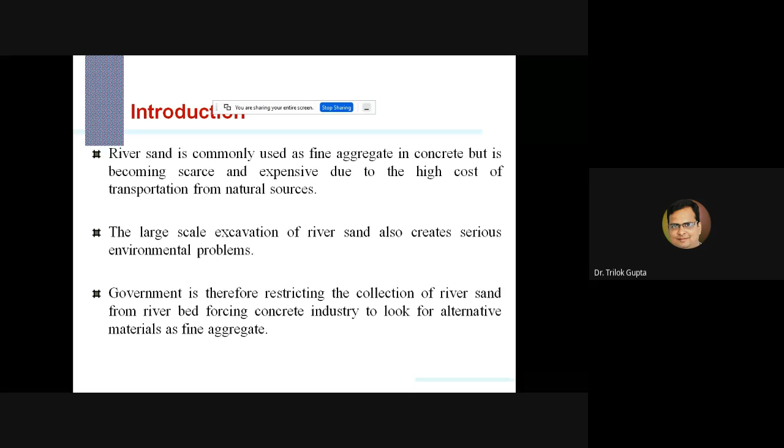As we know, river sand is a very hot issue today. River sand, also called fine aggregate or natural aggregate, is commonly used in concrete, but it is becoming scarce and expensive due to the high cost of transportation from natural sources. Large scale excavation of river sand also creates serious environmental problems, and government is restricting the collection of river sand from riverbeds, forcing the concrete industry to look for alternative materials as fine aggregate that can be effectively and sustainably used in concrete.

We think about whether sand mining is a solution or a threat. As the demand for sand continues to increase, sand mining seems to have popped up as one perfect solution to meet the demand. But sand mining has been causing huge environmental damages, and extreme in-stream sand mining is causing degradation of rivers and lowering of the stream bottom, which can ultimately lead to bank erosion. Decreasing sand in the stream bed and along coastal areas can cause deepening of rivers and expansion of coastal inlets and river mouths.

Saline water intrusion is another negative effect of sand mining. The consequences of mining are compounded by the effect of sea level rise. Any volume of sand exported from stream beds and coastal areas is a damage to the system. Irresponsible sand mining is also a huge threat to river banks, bridges, and nearby structures. It also affects the nearby groundwater system and the uses that local residents make of the river. Sand mining can be responsible for destruction of riparian and aquatic habitats through huge change in channel morphology. Effects include bed coarsening, bed degradation, lowering of water tables adjacent to the stream bed, and channel volatility.

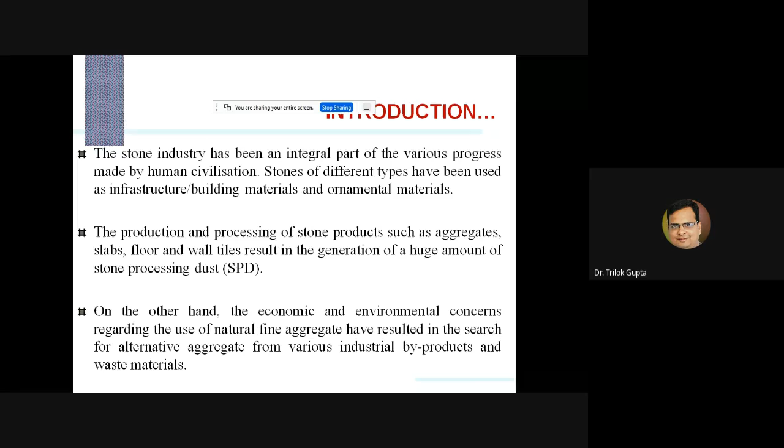Simultaneously, on the other hand, economic and environmental concerns regarding the use of natural fine aggregates have resulted in the search for alternative aggregates from various industrial byproducts or waste materials.

By using different types of crushers, we first use the primary crusher or jaw crusher to reduce the sizes. Then we use the impact crusher for processing to achieve whatever size we want, and after that we use sieves for grading purposes. Ultimately, there is some waste product, which is fine dust, called in our studies the stone processing dust. There are various disadvantages of this stone processing dust, which is basically a waste product generated during the manufacturing of coarse aggregates.

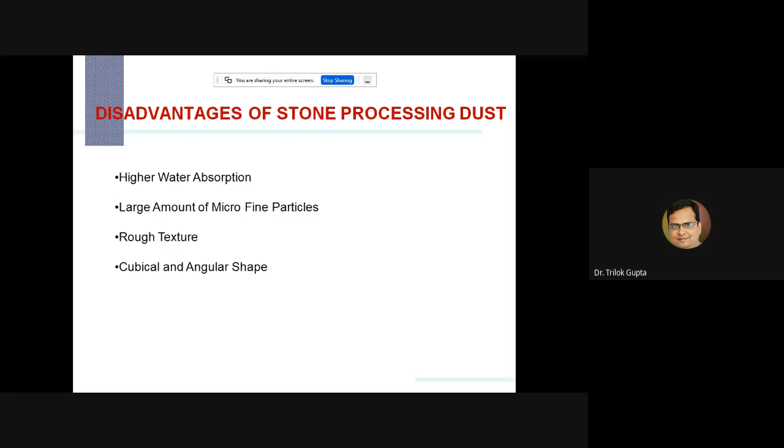stone processing dust, that is basically having high water absorption. In our case, the water absorption was more than 3%, and there are large amounts of microfine particles, and definitely it has rough textures, and sometimes it is a cubical or angular shape.

So there are some environmental problems associated with this stone processing dust, and as we know, our environment should be protected from man-made causes. So this is a very hot issue today, how we can sustain our environment, how we can retain our environment as it is, so that the ecological cycle cannot be disturbed, and human health cannot suffer much more.

So there are some major issues related to the environment associated with stone processing dust: the emission of dust at crushing plants causes extreme air contamination and may bring about airborne infection and diseases. This stone crusher industry is considered one of the most polluting industries of our country due to poor control technologies for dust emission and low technology penetration in the industry. The dust also adversely affects visibility, reduces growth of vegetation, and hampers the aesthetic view of the area.

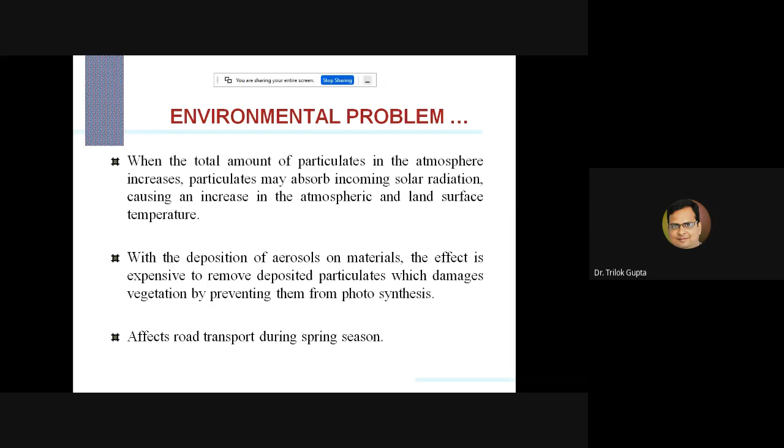And this also affects road transport during the spring season, because poor visibility is one of the reasons, and sometimes it may cause accidents. Dust settled over equipment will cause rapid wear and tear of rotating parts, and there may be corrosion of steel parts, which may lead to frequent breakdowns and higher maintenance costs.

The survey reveals that there is an adverse impact on the health of stone crusher workers in terms of diseases, like skin problems, eye problems, diarrhea, or lung infections. So these may be the common problems.

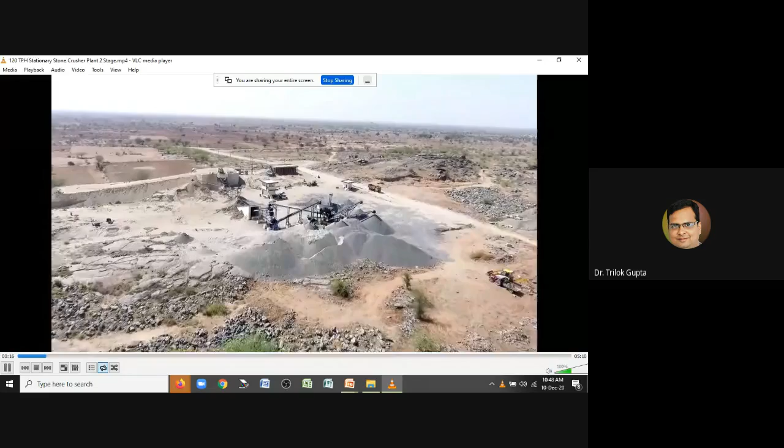This is a short video related to the Udaipur zone itself. There is a Mewar High Tech Engineering facility situated near Udaipur, around 15 kilometers away from the city, at a location called Umada.

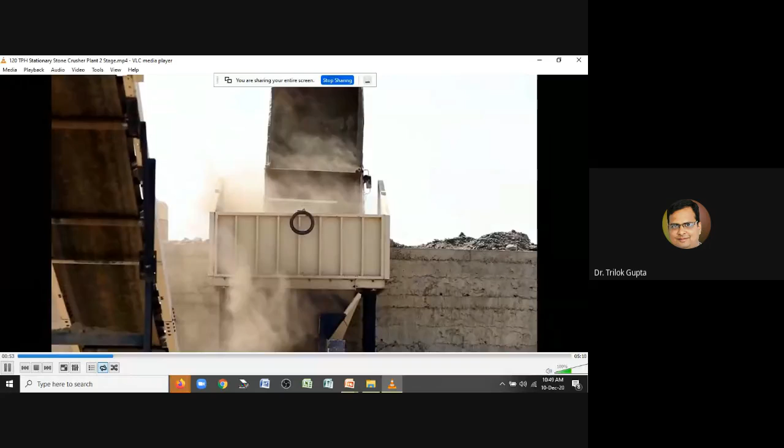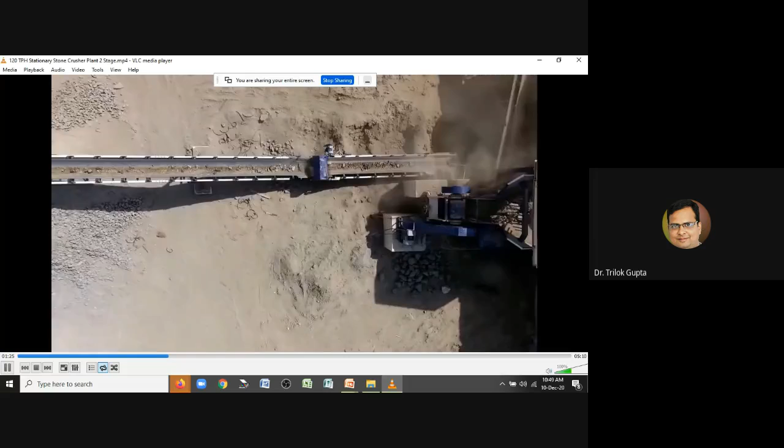This is a 120 ton per hour production unit for coarse aggregates, and simultaneously there is unintentional production of stone processing dust. We can visualize from this figure that the dust is mixing into the air and flowing in the air, which is definitely responsible for air pollution. During the crushing of such stones, there is a lot of unwanted noise created, which is also responsible for noise pollution. We can see that there is no control on the dust particles.

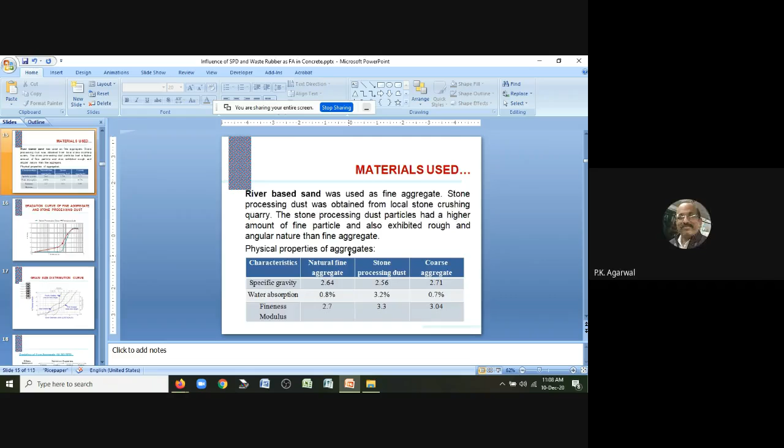So basically in the current study, we replace the natural fine aggregates with stone processing dust, up to 100% replacement in increments of 10%. We find out different types of mechanical properties and durability properties of this stone processing dust concrete, and finally we have calculated the economical and ecological aspects of the stone processing dust.

In this study, we used normal OPC cement of 43 grade, with properties including initial setting time and final setting time. The 7 days compressive strength of this cement was 34 MPa, and 28 days compressive strength was 44 MPa. Consistency was 30%, and specific gravity was 3.11.

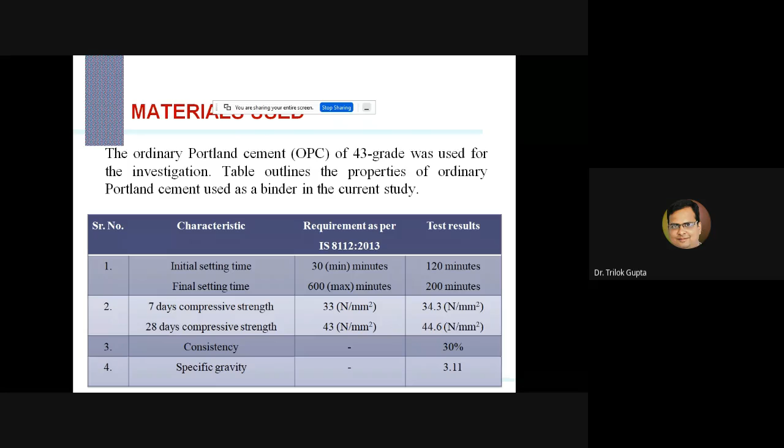Normal OPC cement of Ultratech brand was used, and river-based sand was used as fine aggregate. The stone processing dust was obtained from a local stone crushing plant, and the stone processing dust particles had a higher amount of fine particles and also exhibited rough and angular nature compared to the fine aggregates.

This table shows the physical properties of the aggregates. The specific gravity of fine aggregate was 2.64, and stone processing dust had a specific gravity of 2.56, whereas the coarse aggregate had a specific gravity of 2.71.

All material was obtained from the local area. This natural fine aggregate was obtained from the local river nearby Kharka river, and stone processing dust was obtained from the local crusher plant around 15 kilometers from the city, and coarse aggregate from the same plant. Water absorption was 3.2% for the stone processing dust as compared to 0.8% for the natural fine aggregates, which was too much due to the presence of fine particles. Coarse aggregate had a normal water absorption of 0.7%, and fineness modulus was 2.7, 3.3, and 3.04.

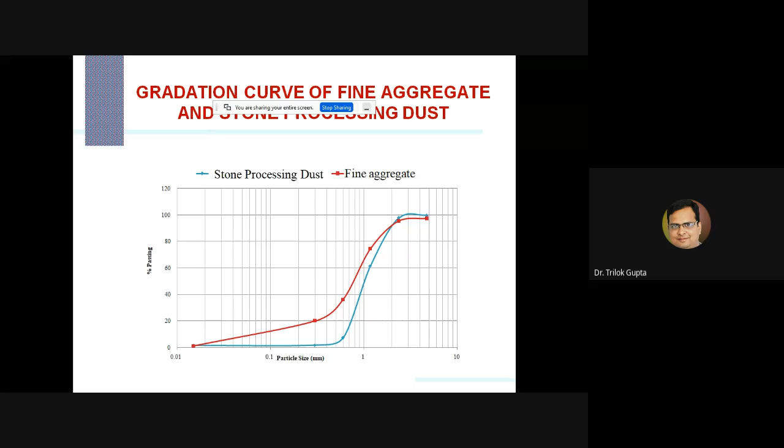This figure represents the gradation curve of the fine aggregate as well as the stone processing dust. As per the IS 383 code, both the fine aggregate and the stone processing dust lie in zone 2. As you know, zone 1 is the coarser one and zone 4 is the finer one, and the code does not recommend using zone 4 sand in concrete.

As we know, through grain size distribution we can classify grades of any kind of aggregate, whether coarse or fine. There is poor graded, where only one size of aggregate is available; gap graded, where one or two sizes are missing from the particle size distribution; and when all sizes are available, that is called well graded. According to this curve, our fine aggregate as well as the stone processing dust lie in the well graded category. This is the gradation classification of the fine aggregate as per IS 383.

So there are four classifications: zone 1, 2, 3, 4, and 4 is the finer one. We will not discuss that now. This is an important curve basically.

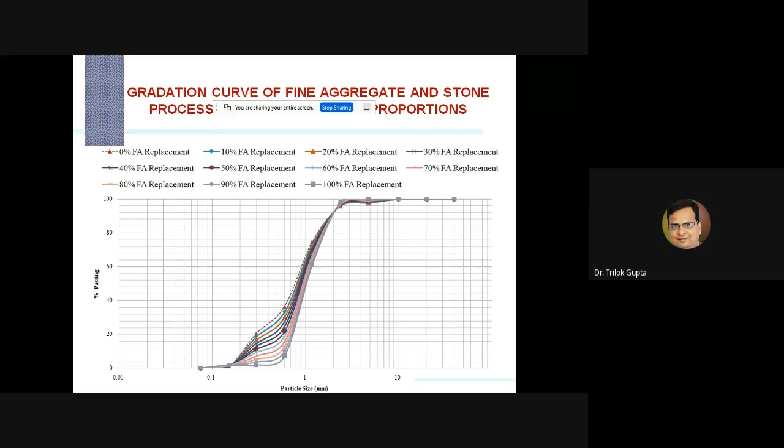The concrete mix design was carried out as per the guidelines of IS 10262, and we replaced the natural fine aggregates with stone processing dust in increments of 10%, going up to 100%. As shown in the last table, water absorption for the stone processing dust was around 4 times that of the natural river sand.

That's why we maintained the same water cement ratio. In this study we used a 0.45 water cement ratio. So we used compensatory water, meaning top-up mixing water was added to the concrete mix to counter water absorption of the aggregates, so that the same water cement ratio could be maintained. Normal casting was done as per standard practice: we cast the mold, left it for 24 hours, then submerged it in water until testing.

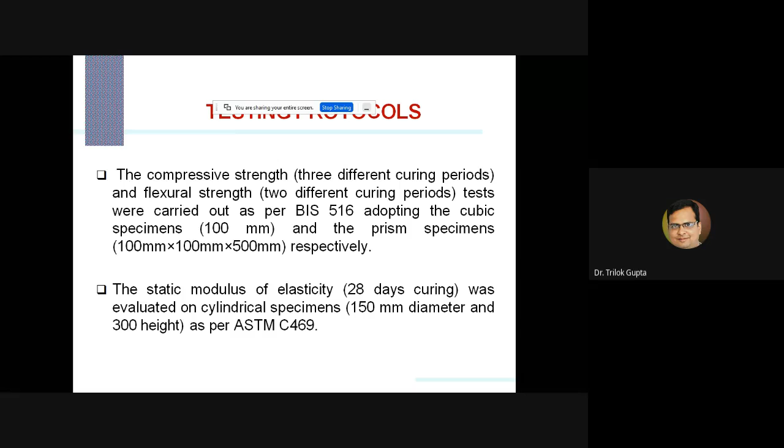It was determined on cylindrical specimens having a diameter of 150 mm and height of 300 mm, and the code followed for the static modulus was ASTM C469. Three specimens were tested for each type of test.

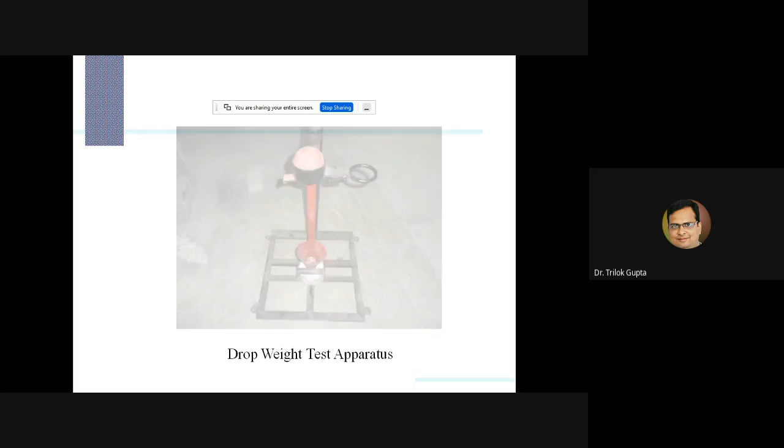After that, to find out the ductile properties, we use the impact resistance by using the drop weight test, as per ACI, American Concrete Institute 544. This type of apparatus was used to calculate the drop weight.

In this, we use cylindrical specimens having diameter of 150 mm and height of 75 mm. We drop a hammer ball having weight of 10 pounds, around 4.5 kg, with height of fall of 450 mm, 0.45 meter. We note down how many number of blows or falls are required for the first crack as well as the ultimate failure - meaning how many blows are required to develop the single hairline crack, initial crack.

That was noted as N1. After that, we continue the testing process and count the number of drops or blows required for the ultimate failure, which is breakdown into number of pieces, meaning more than 2 pieces.

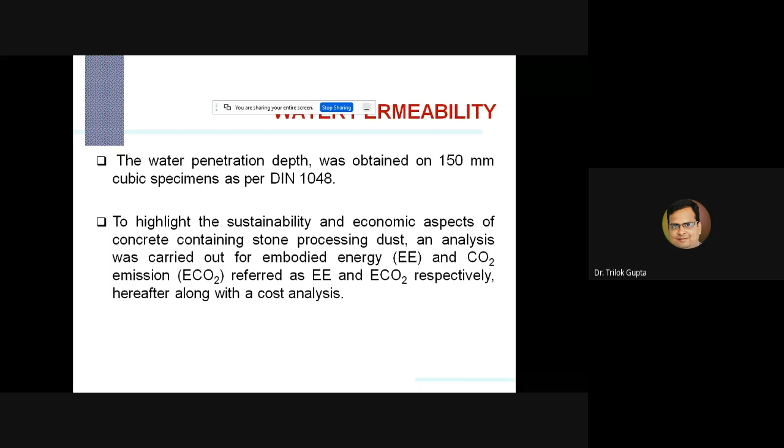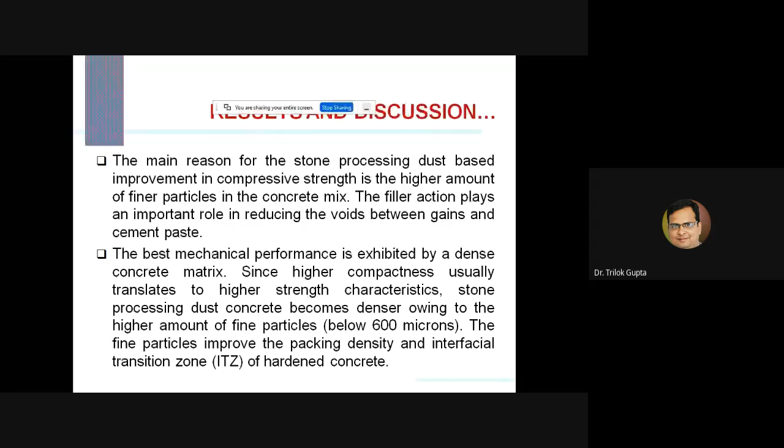the higher amount of finer particles in the concrete mix, due to stone processing dust. The filler action plays an important role in reducing the voids between the grains and the cement paste. The best mechanical performance is exhibited by a dense concrete matrix, since higher compactness usually translates to higher strength. Stone processing dust concrete becomes denser owing to the higher amount of fine particles, that is, less than 600 microns.

The fine particles improve the packing density and the interfacial transition zone of the hardened concrete. For higher replacement of stone processing dust, greater than 70%, the higher amount of fines left after filling the voids increases the cement paste to particle ratio, resulting in lower compressive strength. Additionally, the angular nature of the stone processing dust increases the surface area to be covered by the cement paste, causing the development of voids. These voids have a weaker plane, which leads to low compressive strength. Furthermore, this angularity also lowers the compactness of the concrete by increasing the interparticle friction.

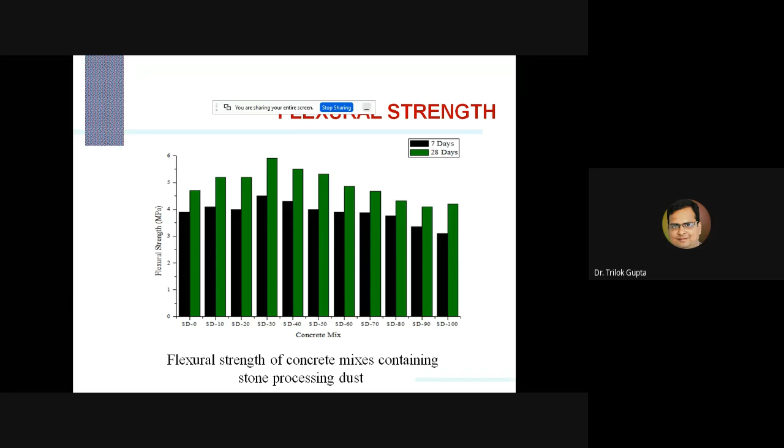As compared to compressive strength, the mechanism of the flexure strength loading is quite different. However, a similar trend was observed between the flexure strength and compressive strength, up to the 30% replacement. Basically this is the same reason, because of particle packing. The fine particles of stone processing dust act like a filler by filling the voids between the cement paste and aggregates, thus strengthening the concrete specimen.

Furthermore, this enhances the compactness and increases the flexure load carrying capacity of concrete containing stone processing dust. We can say that this enhanced compactness improves the interfacial transition zone (ITZ) characteristics of concrete, which helps in the increased capacity to carry flexure loading.

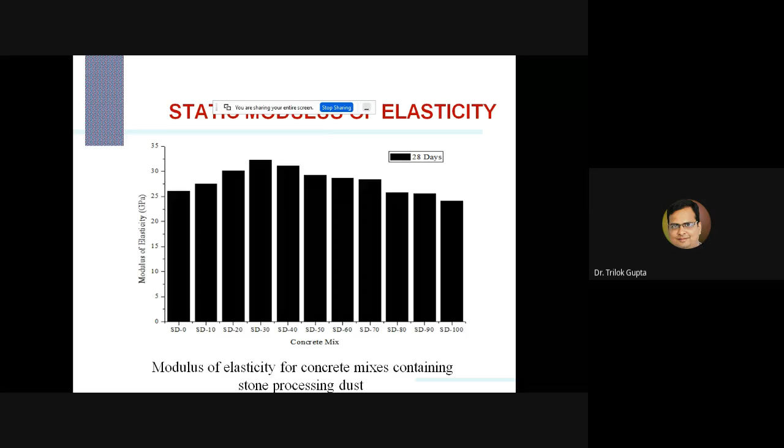Now this next figure shows the 28 days static modulus of elasticity of this concrete. Again, we can observe from the figure that it is increasing, and it is highest at 30%, and after that it goes down, and approximately after 70% it was less than the control mix. Basically, this static modulus of elasticity depends on various factors, such as the type of coarse aggregate, mortar paste stiffness, bond between aggregates and mortar matrix, and void porosity of concrete.

Since the type of coarse aggregate remains the same throughout the study, the rest of the three factors - mortar paste stiffness, bond between aggregate and mortar, and void porosity of concrete - play an important role in influencing the elasticity modulus of the stone processing dust concrete. The addition of finer particles of stone processing dust improves the microstructure of concrete, providing better bonding characteristics between aggregate and mortar matrix. This dense concrete matrix, due to the filler action of the fine particles, presents higher stiffness of mortar paste and increases the elasticity of concrete.

And that's why we got this higher static modulus of elasticity up to the 70% replacement. So that was this. Now we come to the impact resistance.

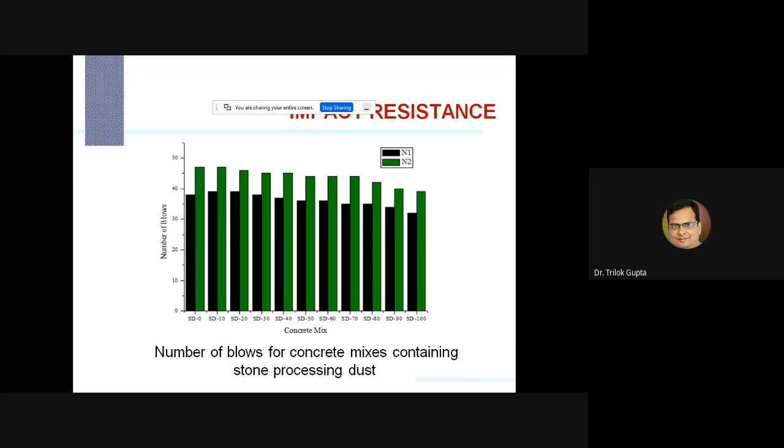But for concrete mixes containing stone processing dust higher than 40%, the impact energy is less than the control mix. So we can observe that after 40%, there is a decrease in impact energy. This impact resistance of concrete depends on the paste-aggregate contact area and bond, how stiff the bond is, and a solid concrete matrix enhances these properties, which are instrumental in resisting the propagation of cracks.

For concrete mixes containing up to 40% stone processing dust, the fine particles densify the cement paste matrix, thereby improving its bond characteristics with the aggregates. In case of higher substitution, more than 40%, the angularity of the aggregates leads to the creation of voids, which provide easy access for crack development. These voids facilitate faster crack development, as a higher amount of voids accelerates the propagation of cracks.

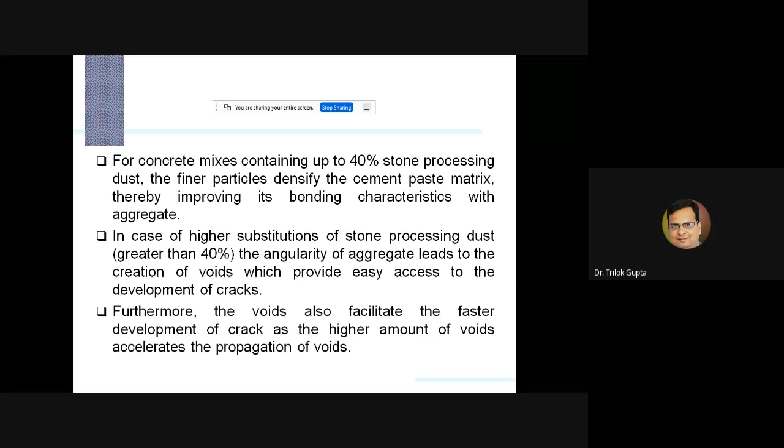This may be due to the higher amount of fine particles, which have the tendency for high resistance up to 20%, but beyond that, this mortar paste containing a high amount of fine particles gets easily eroded when exposed to abrasive force. The fine particles lodged between granular voids are removed from the pockets during abrasive action, and this may increase the depth of wear.

The voids in concrete with a higher amount of stone processing dust also lower the abrasion resistance of concrete, as the chipping action of the abrasive force ultimately weakens the bond of the main body.

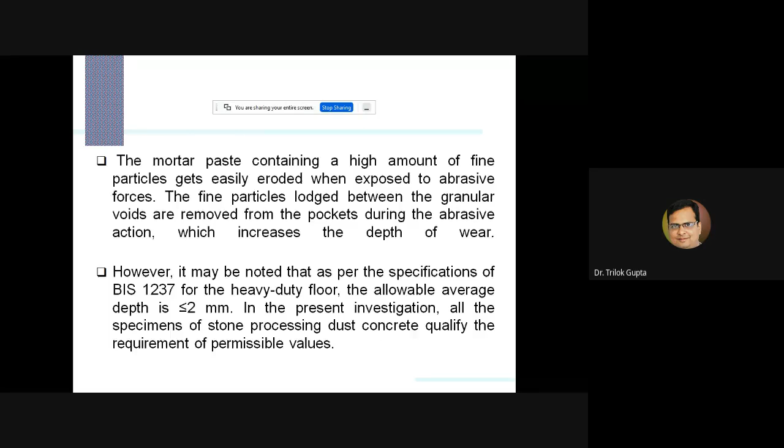As per IS 1237, for heavy duty floors, the average depth of wear allowed is less than or equal to 2 mm. In our case, the value was less than approximately 1.1 mm, even up to the replacement level of 100%. So we can classify and use such concrete up to 100% replacement.

Now in the next category, we find out the water permeability in terms of water penetration depth. As we know, water permeability or water penetration depth provides insight into the durability potential of concrete against ingress of harmful external agents, which can severely compromise the service life of concrete elements.

That may ultimately be responsible for corrosion because of the ingress of water into the concrete, as well as chloride ions, as well as air voids. So such a combination may lead to corrosion.

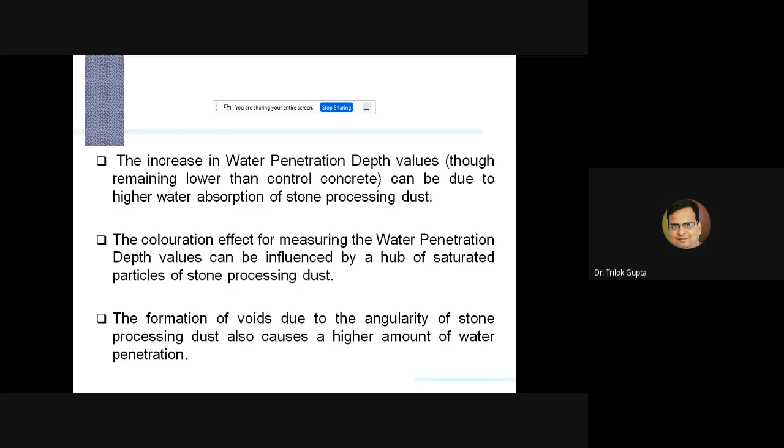In our case, in all cases it was less than 30 mm, so we can say our concrete had low permeability. The increase in water penetration depth value can be due to the high water absorption of the stone processing dust, and this can be influenced by the saturated particles of the stone processing dust. The formation of voids due to the angularity of stone processing dust also causes a higher amount of water penetration.

As we know, stone processing dust is a byproduct of the stone crushing plant, received as-is from the plant. That's why we do not account for any embodied energy for this stone processing dust, since it is a byproduct. Whereas the embodied energy for OPC and fine aggregates was taken from a study carried out by Mithun et al.

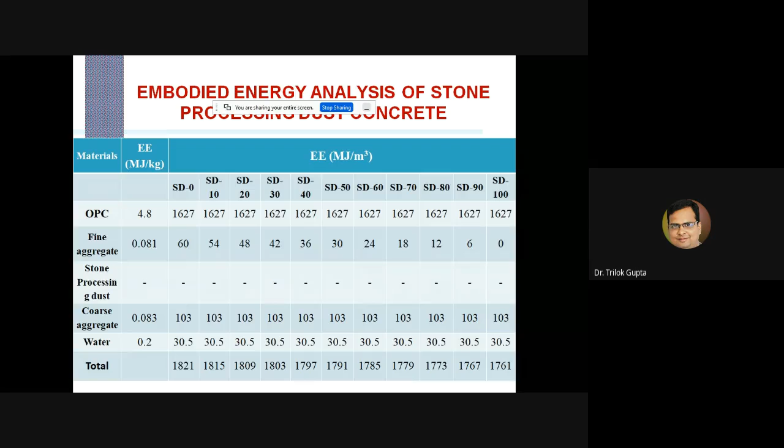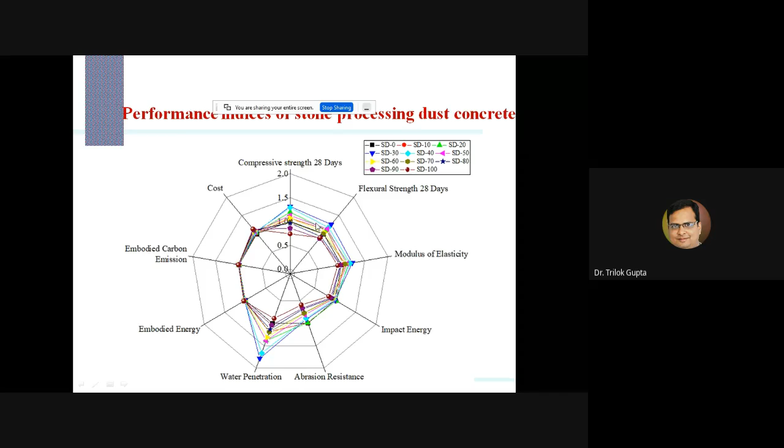In this way, we calculated all other parameters, and in terms of better concrete, we can go for 30% replacement, and if we want to utilize maximum stone processing dust, then we can go for 70% replacement.

So now it comes to the conclusion part. As compared to natural fine aggregates, the stone processing dust contains a higher amount of fine particles and has higher water absorption capacity. Results show that increasing the percentage of stone processing dust up to 70% improves the compressive and flexural strength of concrete, with densification of the concrete structure due to the filler action of fine particles considered as the major cause.

The reduced voids and improved bonding between cement paste and aggregates due to the fine particles of stone processing dust resulted in improved elastic modulus of concrete.

Stone processing dust did not play a significant role in affecting the impact resistance of concrete. However, at higher percentages, greater than 70%, the voids in concrete due to angularity of stone processing dust lowered the impact resistance.

The abrasion resistance of concrete was negatively affected by stone processing dust. The chipping action of abrasion was predominant in dislodging the rough particles of stone processing dust from the concrete matrix.

The depth of water penetration was lowered in the concrete containing stone processing dust, as the fine particles block the pores and capillary voids in the concrete matrix.

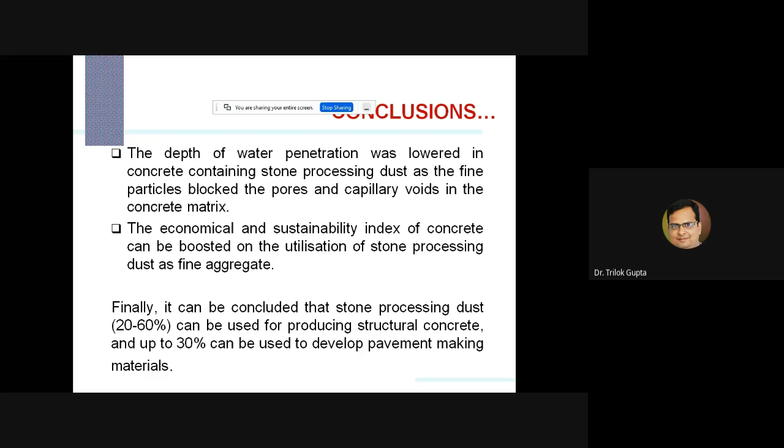Finally, we can conclude that stone processing dust up to 60% can be used without much effect on the durability and mechanical properties to produce structural concrete, and up to 30% can be used for development of paver blocks or pavement material, because there was a reduction in flexural strength after 30%.

Now we come to our second part. I think there is only 15 minutes left, so we go quickly into when we use this waste material, waste rubber tires, in the concrete as partial replacement of the fine aggregate.

Basically, we know that concrete is a brittle material, and high flexibility is required. Higher impact resistance or higher fatigue resistance is required in many applications, apart from strength, where strength is not a major concern in some applications and we require higher flexibility. At that time, which type of concrete can we use?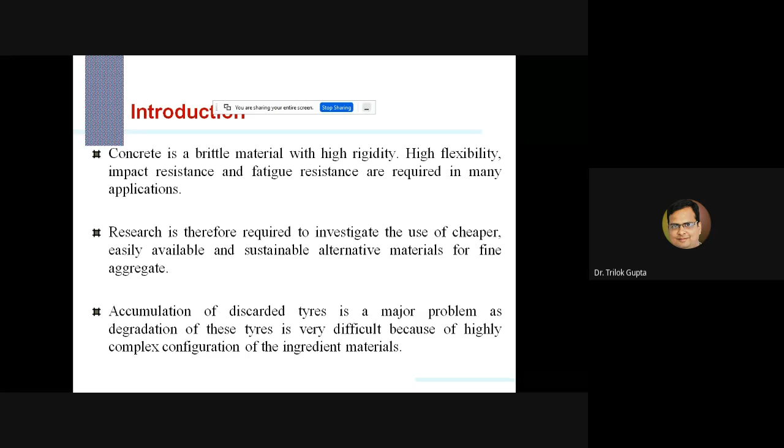Now it comes to our waste material. Basically, in this study we used two types of waste rubber tire material.

First was the rubber ash, which was obtained by the pyrolysis technique. Basically, that is incineration of waste rubber tires at a controlled temperature of around 850 degrees Celsius for 3 days, resulting in a specific gravity of only 1.33, and size was in between...

0.5, and absorption was only 0.3%. These are the chemical compositions, having carbon content around 65%.

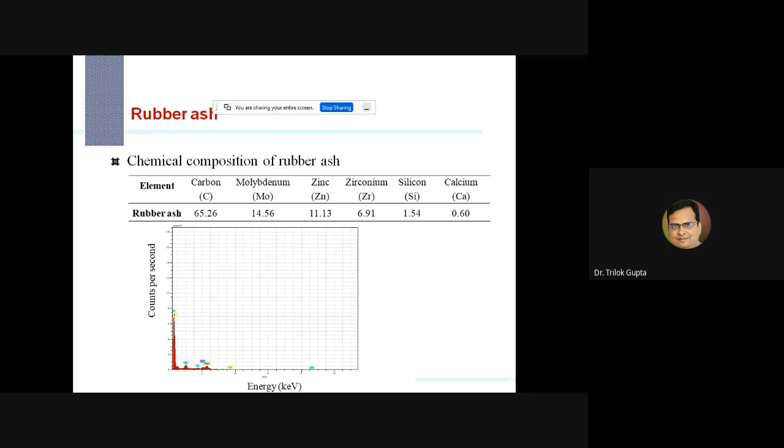Now, another form of this waste rubber tire used in this study was rubber fibers. Specific gravity was 1.07 and water absorption was 0.4%.

Using the same waste rubber tires, these were obtained by mechanical grinding. To obtain the rubber ash, we use the pyrolysis technique, but to obtain the rubber fibers, we simply use mechanical grinding of the waste rubber.

Tensile strength was 20.8 MPa, whereas the width was 2 mm to 5 mm, and length was around 20 mm. The aspect ratio was 4 to 10. Aspect ratio is the ratio of length to width or diameter.

Specific gravity 1.07, water absorption 0.4, and lies in zone 2. There was a higher percentage of carbon because there was no heating process, so the carbon content was 87%.

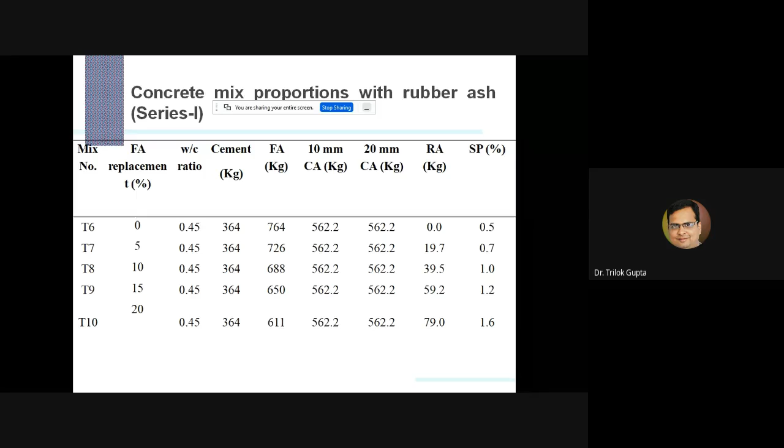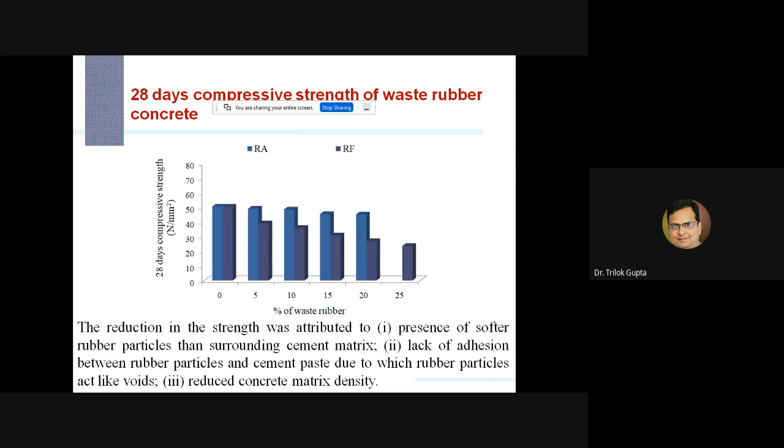Compressive strength was again calculated. The figure shows the 28-day compressive strength, and reduction was observed in case of rubber ash as well as rubber fiber. But in case of rubber fiber, there was much more reduction compared to rubber ash concrete. The reason was the presence of softer rubber particles than the surrounding cement matrix, and lack of adhesion between rubber particles and cement paste, due to which rubber particles act like voids and reduce concrete matrix density.

Now, abrasion resistance: depth of wear increases with increasing replacement level of rubber ash, whereas it decreases with increasing replacement level of rubber fibers, because it was very difficult to abrade rubber fiber concrete.

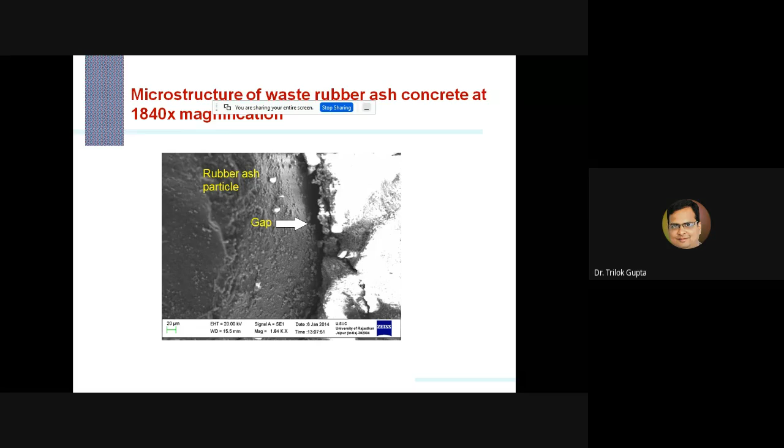These are some scanning microscopic images. This figure shows rubber ash particles at a magnification of 1840, and we can visualize a gap between the rubber ash and the cement paste, which was the reason of reduction in compressive strength. We can also observe cracks between the rubber ash particles and cement paste, along with further gaps and cracks.

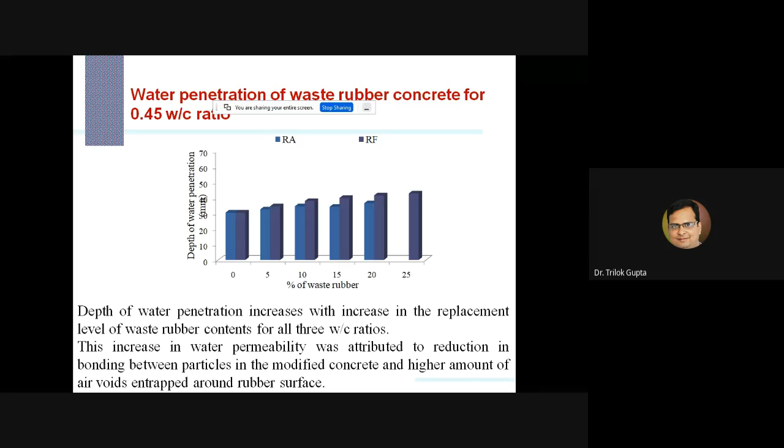The figure shows the water penetration depth of the waste rubber concrete at a 0.45 water-cement ratio. Depth of water penetration increases with increasing replacement level of waste rubber content for all water-cement ratios. This increase in water permeability was attributed to reduced bonding between particles in modified concrete and a higher amount of air voids entrapped around the rubber surface.

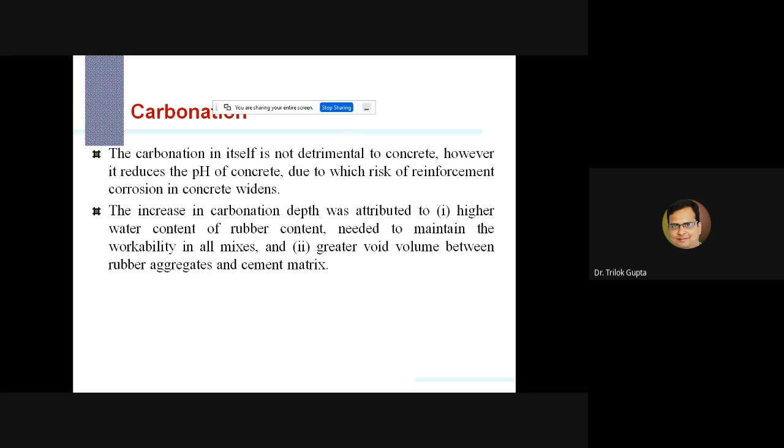Static modulus was also evaluated, and it again decreased, as this is a dependent property of compressive strength. The basic reason was the lower modulus of elasticity of the newly added material, which was softer compared to the original material.

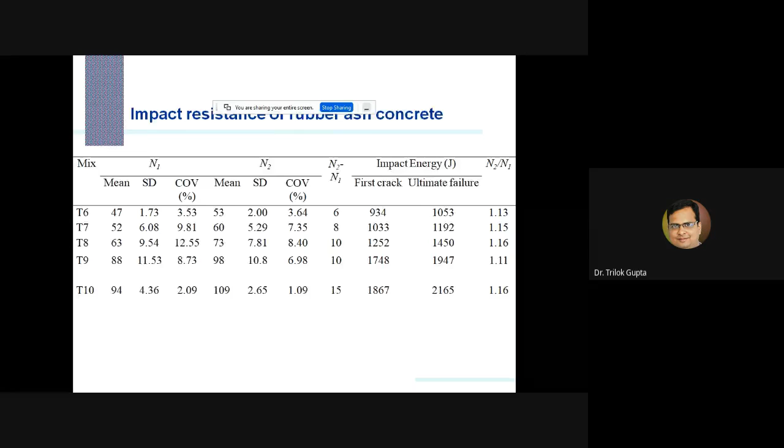We can observe around 100% increment in the case of 20% replacement of rubber aggregate, and in case of rubber fiber concrete, there was around a 4 times increase in impact resistance. So, like crash barriers or curb stones, where collision of vehicles may happen, at that time we can use this type of concrete.

The increase in impact energy resistance may be due to less brittleness and much lower elastic modulus of rubber aggregates, which increases impact resistance, and the ability of rubber to absorb dynamic energy increases the strength of concrete under impact loading. This was the failure pattern in case of waste rubber concrete.

In the case of the control concrete, the first figure shows brittle failure, and in the case of the 25% rubber fiber concrete, we can say that there was ductile failure.

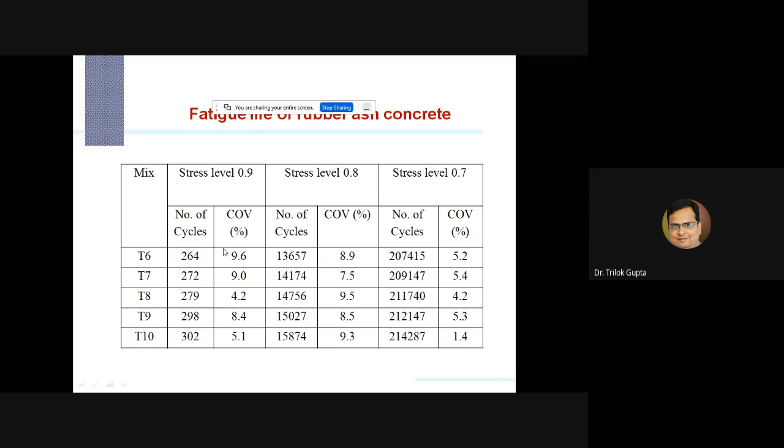Now the fatigue strength was also calculated at a frequency of 5 Hz, and we can observe that there was a stress level ratio at 3 levels. Due to time limitation, we will not discuss more in detail. Fatigue resistance was increased in case of both rubber ash concrete and rubber fiber concrete, but in case of rubber fiber concrete there was much more increment. This increase in fatigue strength may be due to the rubber particles being able to absorb more energy when subjected to fatigue loading, which also reduces the probability of internal crack propagation and prevents aggregate segregation with the waste rubber particles.

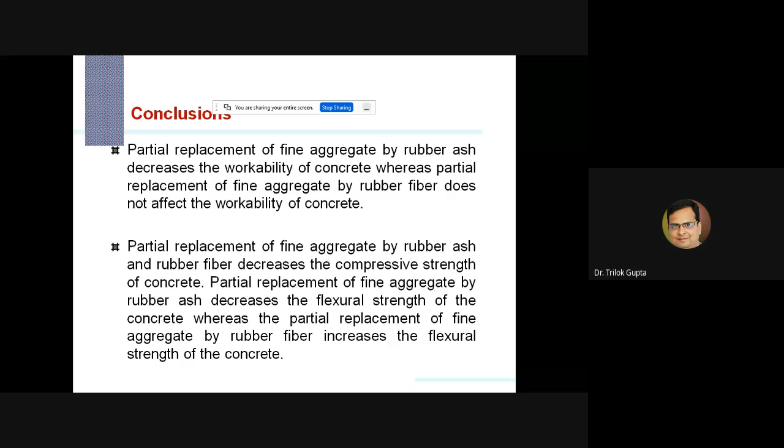Now for conclusions: we can conclude that workability, if we use superplasticizers, was not affected, but in case of rubber ash there was a decrease. Partial replacement of fine aggregate by rubber ash and rubber fiber decreased the compressive strength. In case of flexure strength, rubber ash concrete decreased flexure strength, but rubber fiber concrete showed enhancement or increment.

The maximum depth of wear in rubber ash and rubber fiber concrete is less than the permissible limit. The water permeability remains in the category of medium permeability. Rubber ash and rubber fiber particles increase the drying shrinkage. The observed carbonation depth for rubber ash and rubber fiber concrete in the most adverse condition is less than the minimum cover required. The reduction in static and dynamic modulus shows higher flexibility.

Impact resistance of concrete improves on replacement of fine aggregate by rubber ash and rubber fiber content. Fatigue strength of concrete also improves on replacement of fine aggregate by rubber ash and rubber fiber content. We can conclude from this study that fine aggregate can be replaced by rubber fiber and rubber ash where ductility is the prime concern and strength is not the prime concern.

Rubberized concrete can be used in partition walls due to its lightweight nature, pedestrian blocks and residential driveways due to higher flexure strength in case of rubber fiber concrete, garage floors, highway crash barriers due to better impact resistance, and machine foundations due to better fatigue resistance.

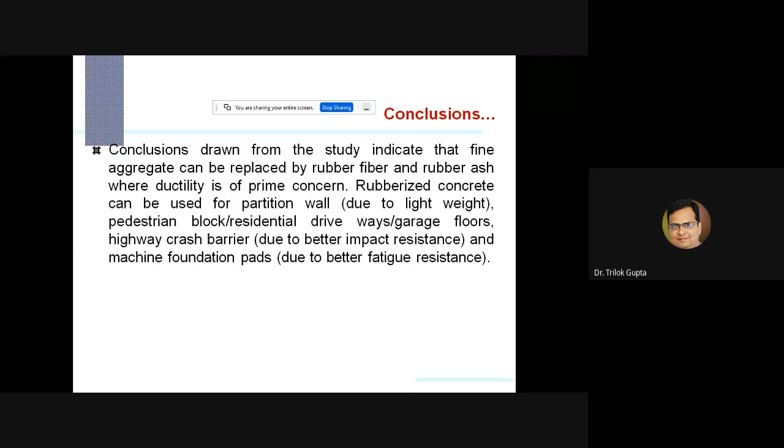So thank you, I think I have taken much more time.

Now the screen has moved out. I don't know where is the issue. Whether others are able to see. Hello.

Haan, koi participant unmute karke bata dein, aap logon ko screen dikh raha hai kya? Yes sir, it is visible. Yes sir, but for me it is not. Now I am not getting the screen. I am perhaps getting your screen, the entire screen, not the presentation part.

Let me join again. Sir, you have joined again, sir. Are you able to see the screen? No, I am not able to see the screen. I don't know what is happening.

Now I am able to see the screen, sir. So should I? No, yes. It has moved out once again. First slide, it is not visible to you, sir. One second.

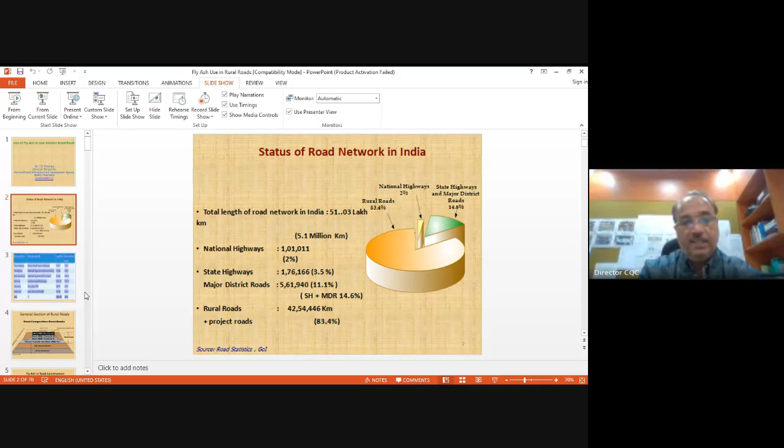Here you can see the road network in India is 51 lakh kilometers. National highways are 1 lakh. Actually, on the next slide you will find slightly different data, because as on date it is much different from what has come on the screen. State highways are around 3.5%, which is 1.7 lakh kilometers. Major district roads are 5,61,940. Rural roads are 42,54,000 kilometers, including the project roads. So roughly this government publication shows around 83% of the roads, including project roads, are rural roads. That is the whole purpose of showing this slide.

In the second slide, now you can see here this shows 56 lakh 3,293. This is as-on-date record from the same Ministry of Road Transport and Highways, NHAI website, etc. So roughly a 5 lakh kilometer data difference is straightaway there.

There are a variety of reasons for this; we need not go into the details. Our focus point is low volume roads, which are mostly looked after by Rural Works Departments, PWDs, and Panchayati Raj institutions in different states. Here it comes to around 70%. I have kept project roads separately, which if added, around 6%, becomes 76%. So we can say in a nutshell that rural roads are not less than 70% of the overall road network of the country. Actually speaking, in terms of length it is more than 70%, but in terms of volume which they carry, it is very small.

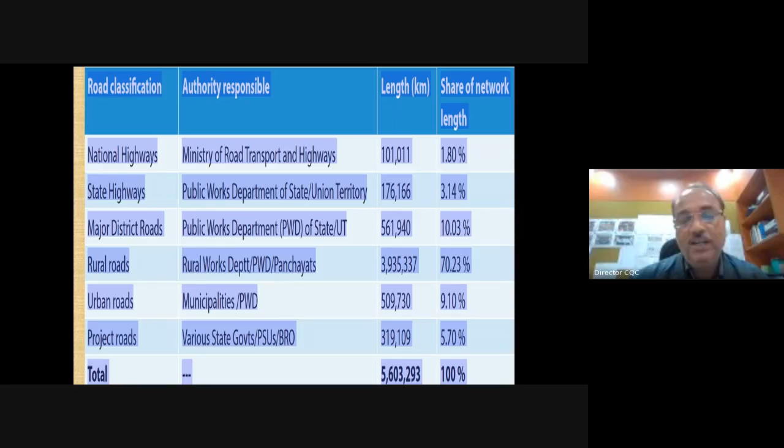40% of the commercial traffic is normally carried by the national highways, which are only 1.8% of the network. And that is why for the last 10-15 years you must have seen a huge number of schemes, tremendous investment being made in development of national highways, so that this can be made at least 4 to 5%, and the load of traffic can be substantially reduced on the existing highways.

As on date, working as Director Project, I am responsible for quality assurance systems, trainings, human resources development, and R&D component under the Pradhan Mantri Gram Sadak Yojana.

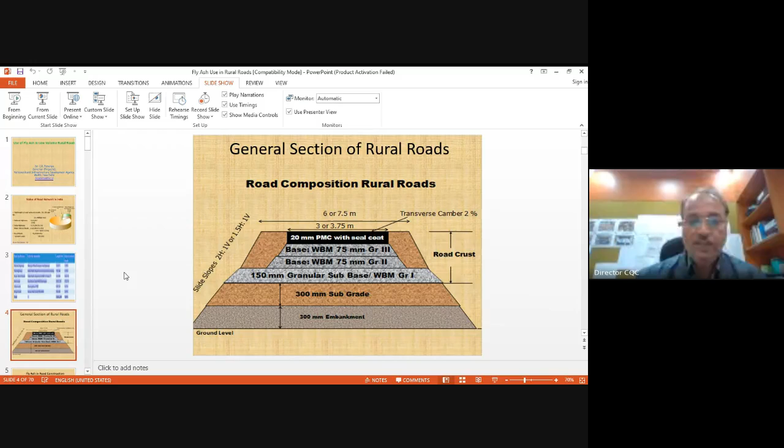This is the standard section which is being used commonly in most of the rural roads. Here you can see we have a thin embankment of around 300 millimeters subgrade. Above that, we have around 150 millimeter granular subbase, 2 layers of WBM, and a thin bituminous premix carpet surface with seal coat. This is the general cross section. Both sides there are shoulders which are around 1.7 to 1.85 meter wide. The overall road top width is 7.5 meter in general.

Many times it is 6 meters, and even now we are constructing a couple of intermediate lanes, so there the overall width at top will be around 9.5 meters. The purpose of showing this slide is that in rural roads, we are constructing the embankment, including the subgrade, which is not more than 600 millimeters in majority of the roads.

The general impression in the minds of our qualified engineers is that when we have a thin embankment and subgrade less than 600 millimeters, how fly ash can be used in construction of rural roads. So that is what we will be discussing in the upcoming slides, that even with this kind of thin sections, or even when we have this kind of thin subgrade and embankment, we can make use of fly ash, and a couple of roads have been already built in various components. If there is a will, we can definitely do it.

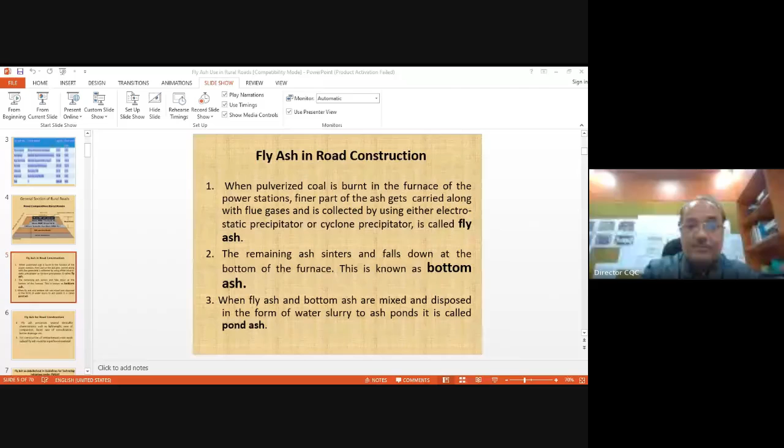So when fly ash is being used in some or other form, the road is sanctioned as a road of new technology initiative. In fact, the IRC guidelines provide that there should be a minimum cover of 50 centimeter on the fly ash layer. So in our new technology guidelines, as I said in the beginning, our total embankment, including subgrade thickness, is hardly 60 centimeter, and we have to provide a cover of 50 centimeter to the fly ash layer. That means only 10 centimeter embankment can be made with fly ash.

So just to avoid this, we discussed with a couple of stakeholders, fly ash producers, other scientists working in CRRI and various other agencies, and finally took a decision that out of 60 centimeter, we will be making 30 centimeter embankment with fly ash, and the requirement of all-round cover can be reduced to 30 centimeter only.

So we issued these guidelines. Then Government of India also issued guidelines in general that within 100 kilometers of a thermal power station, the use of fly ash in road construction is mandatory. We got this revised in 2016 after a lot of discussion with Niti Aayog, which is keeping a follow-up with all agencies for utilization of all kinds of waste materials.

Then the Ministry of Environment and Forest issued a separate government resolution, which clearly indicates that for rural roads, especially being constructed under Pradhan Mantri Gram Sadak Yojana, from thermal power plants up to 300 kilometers, the transportation is to be done by the producers, and it is to be supplied free of cost right at the place of construction of the road.

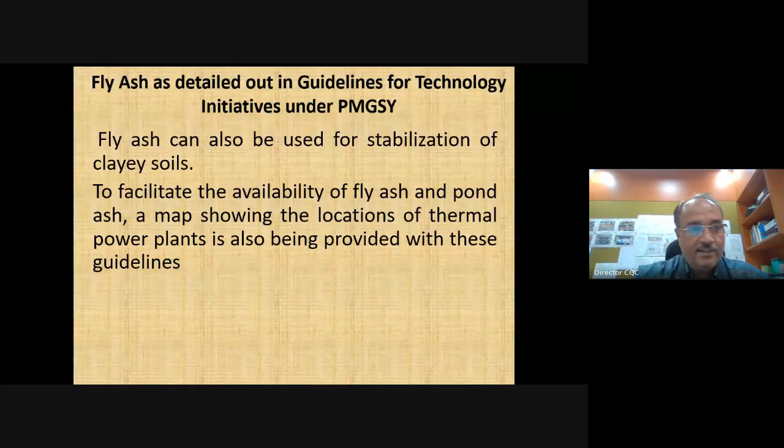I hope I'm visible and audible. The screen is visible. Hello. Sir, you are audible to me. I think any participant may confirm if it is visible. Any participant can unmute himself or herself and confirm whether the slides are visible. Yes, sir, it is visible.

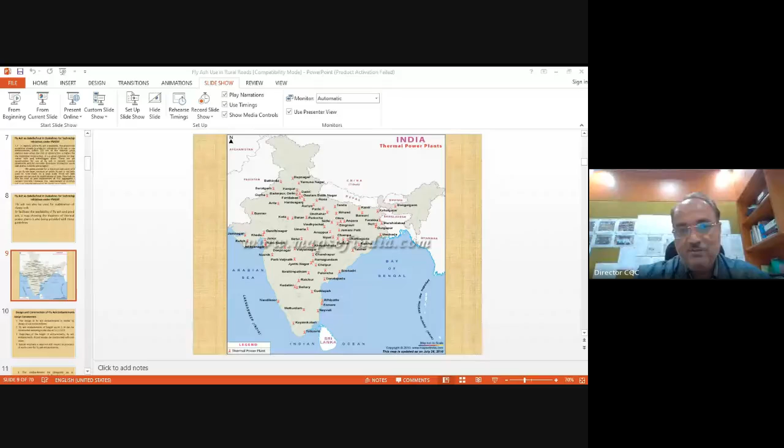So right now on the screen, there is a map which shows the locations of various thermal power plants in the country. Using this map, which was prepared basically by the Central Electricity Authority, we have requested them to provide the geo coordinates of all these power plants. We have requested each of the plant operators to provide us the general characteristics of the fly ash, pond ash, whatever is available, and we have also requested them to provide the contact details of the people who will be handling the supply.

Whosoever has provided this, we have put it on our website, pmgsy.nic.in. We now have a complete GIS database, where we have provided the locations of these plants. From each plant, in order to check whether I am within 100 or 300 kilometers, and from which plant transportation will be easier and cost less, we have provided a facility on that GIS platform where the user can click and draw a circle of 100, 200, or 300 kilometers, so that he will know from which plant he should get the supply.

So with this, a couple of agencies have come forward, and now they have started use of the fly ash.

Design and construction of fly ash embankments. In general, these are the design considerations. Fly ash embankment design is similar to that of soil embankments. Fly ash embankments of height up to 3 meters can be constructed adopting a side slope of 1:1.5. Regardless of height of embankment, fly ash embankments should always be constructed with soil cover. The focal point is that wherever we are using fly ash in layers, we have to keep a minimum all-round cover of 30 centimeters, that is on sides as well as on top.

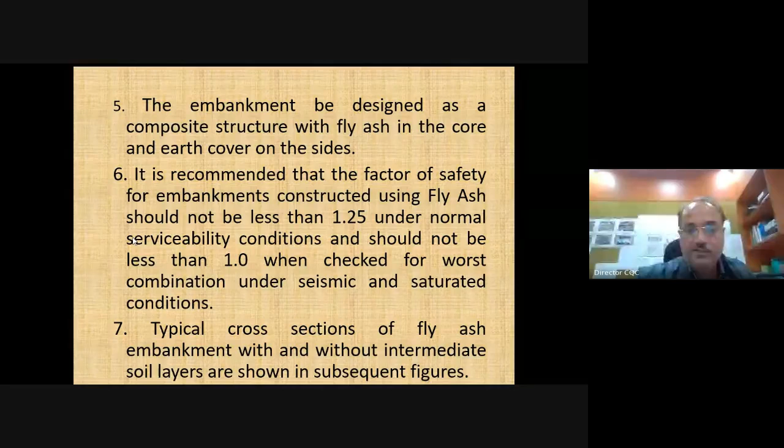So this is an additional factor of safety. A typical cross section of a fly ash embankment, with and without intermediate soil layers, is shown in the subsequent slides. This also shows a 0.5 meter minimum cover, but later on we changed it to 30 centimeters, 0.3 meter on each side.

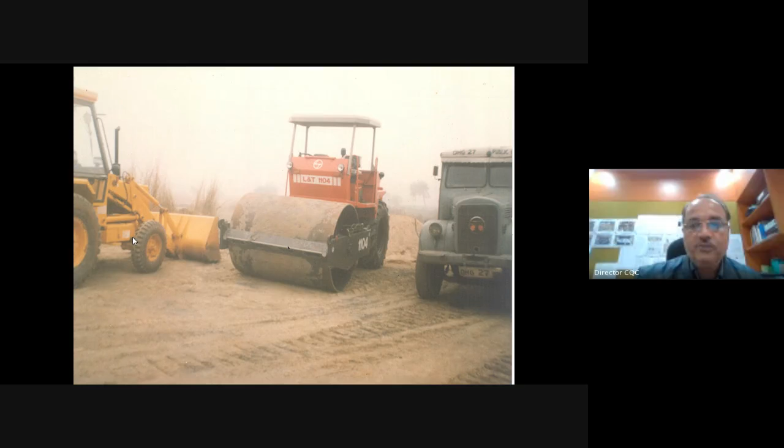So what will happen? You will fill up this trench with fly ash, consuming substantial volume. On top of it, you will also have a 30-35 centimeter high embankment, either as a core or in layers, constructed with fly ash. Then the soil taken from the trench can be used to provide the soil cover on top of that embankment and on the sides. So the complete material has been utilized, and a huge quantity of fly ash has also been consumed, meaning you are almost not required to bring good quality soil from outside for making the subgrade. That is the whole purpose of doing this.

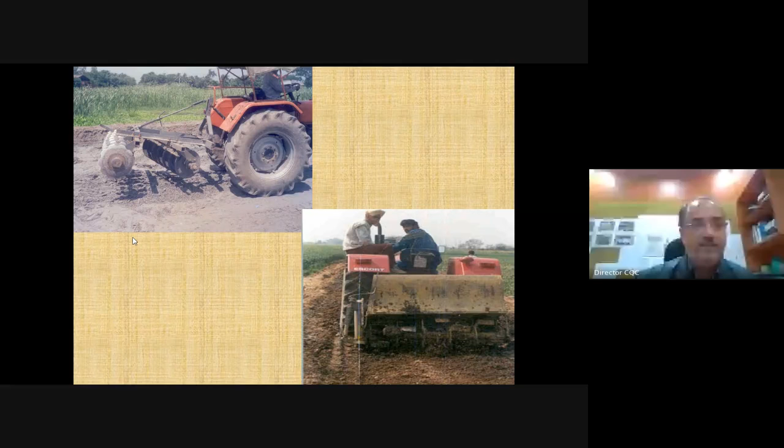Mixing can be done with agricultural equipment, which is now available in every village, and compaction can be done with the help of rollers. I will be showing the properties of fly ash in the next slide.

So for construction of the core, there is no issue. Otherwise, it can be mixed with the local soil to improve the characteristics of the local soil or to improve the CBR value.

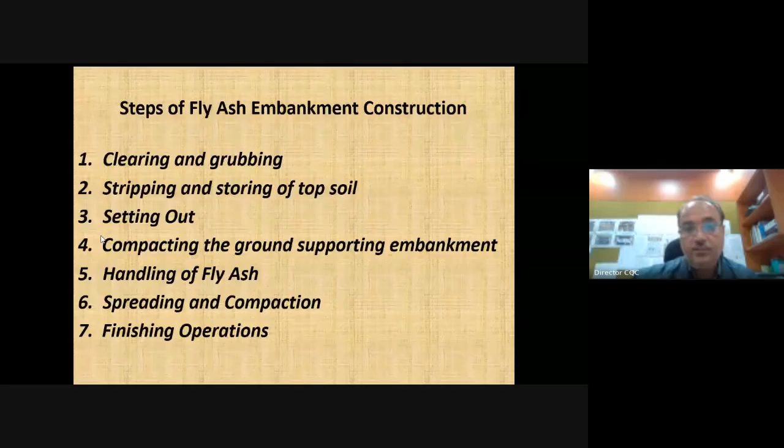Lime fly ash bound macadam is a very good specification, but again the issue is availability of lime and the technology of mixing it with the aggregates, so that in place of water bound macadam, lime fly ash bound macadam can be done. But this is also rarely being used, only because of the issue of availability of good quality lime.

Now coming to lime fly ash concrete. Lime fly ash concrete is resistant to softening under water action and can serve as a good working platform on soft foundations. Wherever we have poor soil or very soft foundations, it can be used as a good alternative.

A lesser thickness of WBM can be used because we are providing lime fly ash concrete as a bed at the bottom. It is suitable for heavy rainfall areas, black cotton soil areas, and places where good quality aggregates are not easily available.

The specification exists, but the problem is in areas with very high rainfall, such as the northeastern states of our country, which do not have availability of fly ash. Now the first plant has come in Assam, but beyond Assam, there are no thermal power plants in 7-8 states in the Northeast. That is why use of this specification has also been very limited.

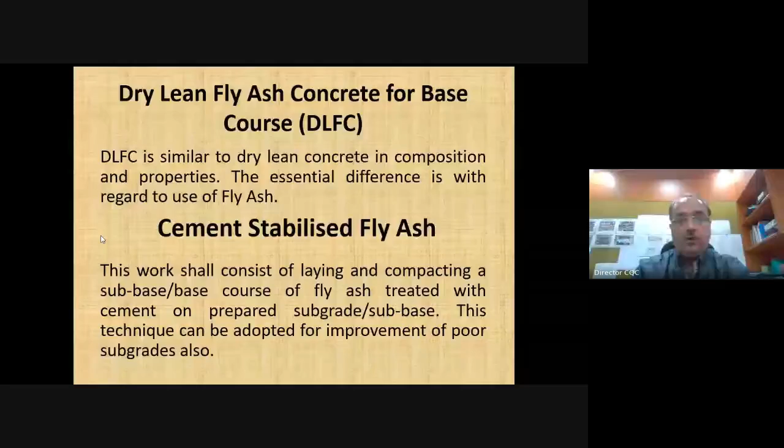Bottom ash or coarse type of fly ash can be used in place of granular sub-base material, provided they have CBR more than 15%. As I said in the beginning, bottom ash is normally granular, while pond ash, because finer materials are carried away by the flowing water jet, tends to be coarser in size.

So it can be used for construction of shoulders or for mixing in the GSB material. If it has substantial granular material in it, it can be directly used as a granular sub-base course without any alteration or stabilization. Otherwise, it is mixed with local soil or local muram, so that we get a CBR of more than 15 or 20%, which is the bare minimum requirement.

Now, in the next slide, I am showing the MORD specifications for rural roads. In fact, till the year 2000, before the start of the Pradhan Mantri Gram Sadak Yojana, most rural roads were being designed based on thumb rules, or following the same design principles used for higher order roads such as state highways or major district roads.

These are given in some of these slides. I will not be talking on them, I will be moving quickly. I will request Professor Agrawal to move the slides one by one a little quickly. This we have already discussed, so I am just skipping it.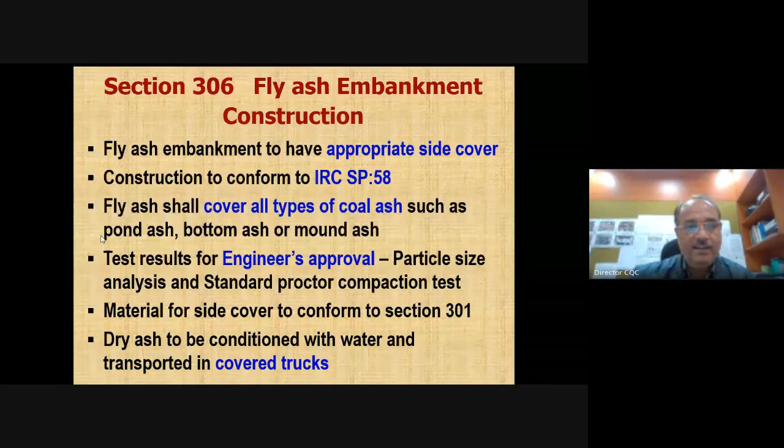I will be just moving fast. This is section 306, which provides all these specifications for fly ash embankment construction in rural roads. This is again a continuation of the same - this is a typical cross section of fly ash road embankment as per IRC SP 58. There is a separate IRC specification over and above our MORD specifications, which covers construction of fly ash road embankments. It is IRC SP 58, being displayed on your screen. This covers construction of road embankments of all types, not very specific to rural roads.

So out of this specification only, we have drafted the specifications for the MORD book of specifications. These are the guidelines for use of fly ash in road embankments. I am just skipping it - the same thing out of SP 58.

Now these are the engineering properties of fly ash and soil being compared. You can see that in most of the cases, the fly ash is almost having similar properties as that of the soil, maybe silt or maybe clay. Only thing is the density is lower because it is light in weight. And that is why, as I said, in order to make use of it in the shoulders or in other layers other than embankment, normally it is mixed with some other local material, so that the density is also increased and satisfies the bare minimum requirement as per the specifications. The rest of the properties are not much different from that of the soil, silt and sand. And even if they are different, they are definitely on the positive side.

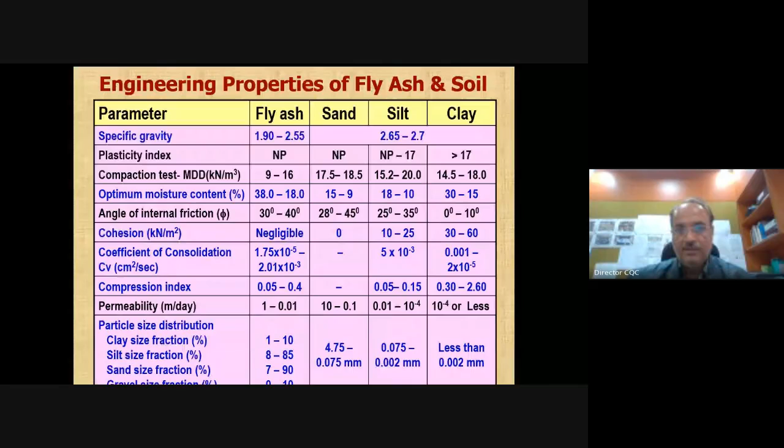These are the results of some of the fly ash from various thermal power stations where it has been used in construction of rural roads. I'm just showing you one by one. This is from Kahalgaon in Bihar, where this project was taken. This is again the same units used for mixing.

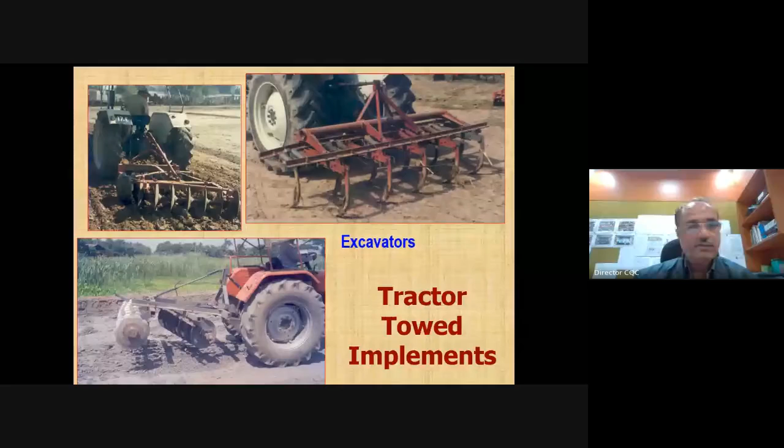These are the characteristics from this table, based on that CRRI project, where fly ash was used for compaction, for stabilization with cement. Here you can see 65% pond ash, 29% soil, and 6% cement was used. The 7 days UCS was 1.35 MPa, and 28 days UCS was 2.6 MPa. So this satisfies our requirement of sub-base course, and that is why based on this we have sanctioned a couple of projects, though we later on advised the states that the pond ash component may be reduced a little bit because it is the first project. So maybe reduce by say 10 to 15%, and some local aggregates may be added along with the soil to further improve the UCS for sub-base course.

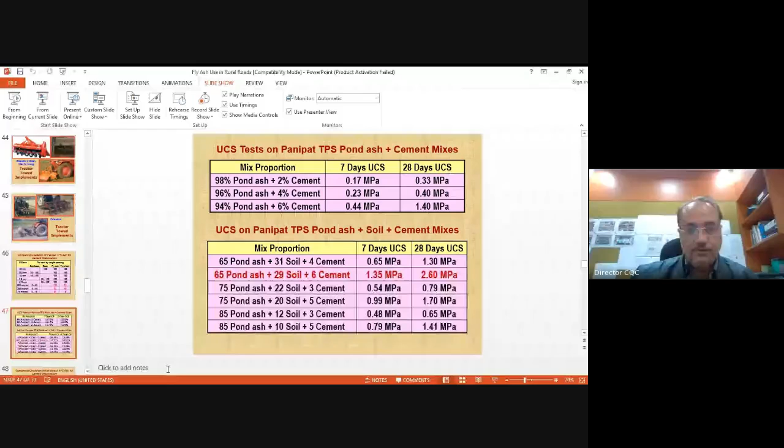I am skipping a couple of slides. Flyash for road pavement construction - this is also a stabilization part we have discussed. This is a very important figure which will make things more clear.

Typical cross section of a rural road: conventional section versus using Flyash. Normally, muram or granular material is used as a sub-base course, below that is subgrade, and below subgrade there is embankment. So embankment and subgrade together can be constructed using Flyash, or soil can be used for the subgrade while the embankment is constructed with Flyash.

Over that, we normally have muram or GSB as a sub-base course, which can be replaced to promote the use of pond ash or Flyash. That is why I have drawn these together: mechanically stabilized pond ash as a sub-base course.

Over that, cement stabilized ash, cement stabilized pond ash, and cement stabilized Flyash form one layer equivalent to one layer of WBM. So where stone material must be transported from long distances and Flyash is easily available, Flyash can be stabilized with cement and used even as a base course layer. On top of that, only one layer of WBM can be constructed, and then the premix carpeting can be done.

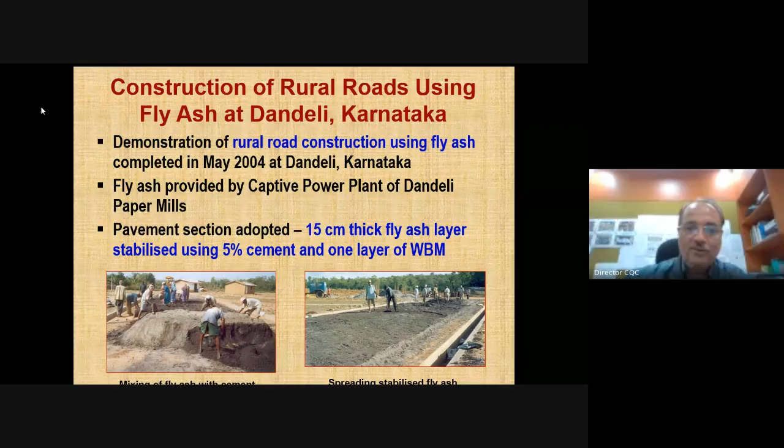Plain cement concrete - as you all know, cement can be replaced with Flyash provided we are using ordinary Portland cement. If we are already using PPC, then probably this should not be done. And even if someone plans to do it, it should be done under strict laboratory quality control.

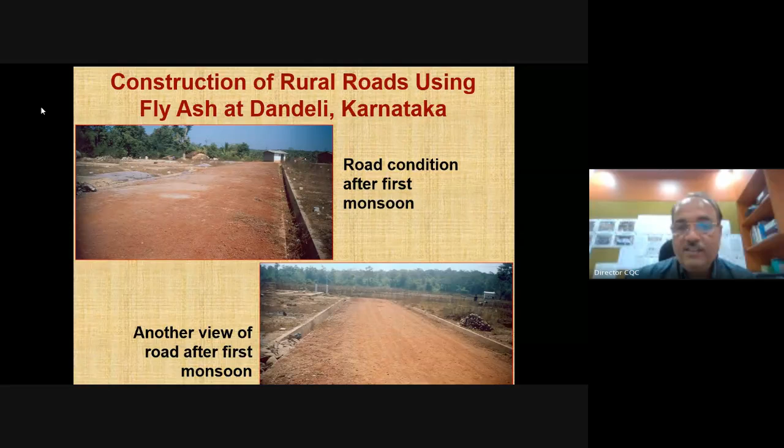In the lab, first we should design how much cement can be further replaced in case of PPC - normally it should not be. So after Flyash, the cement comes to 270 kg per cubic meter minimum, which is normally around 350 kg to 425 kg per cubic meter. So even in OPC, how much cement can be replaced is also to be decided through laboratory trials, and only then is it to be permitted for execution.

These are the specifications available in the Red Book as well as the Orange Book of the Ministry of Road Transport and Highways - they are almost identical. The only difference is that in case of rural roads, we have further relaxed the limits, because the loading on rural roads is much lower than that of higher order roads.

Then coming to roller compacted concrete - this has not been used on a very large scale in India, but under PMGSY we have tried to construct a couple of roads using roller compacted concrete, and in one or two cases even replacing the cement partly with the help of Flyash.

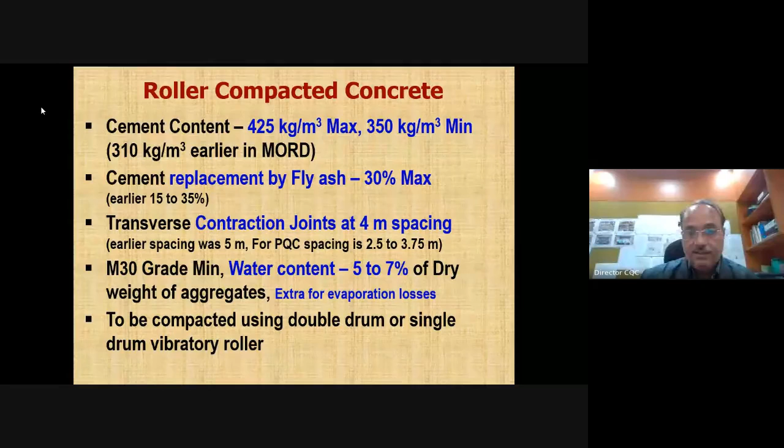These are the same specifications of roller compacted concrete - this is what is required as aggregates in that concrete. Cement concrete blocks - there also, to some extent, Flyash can replace the cement, but that again has to be done under strict quality control.

This is the same figure showing how bottom ash or Flyash can be used, and then we have to take a soil cover of minimum 0.3 meter. Here, below the pavement layers, stabilized Flyash base has been put with 100 mm thickness. So the design shown in the previous slide was also used in this project as a demonstration project.

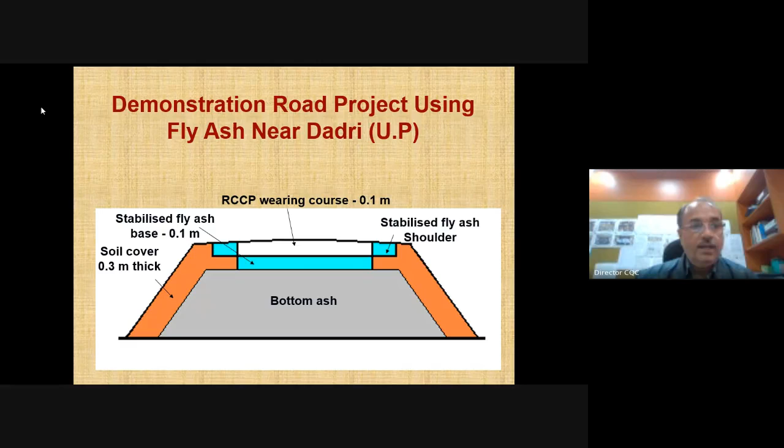As the organizers at the last moment asked me to talk about the use of waste plastic in construction of rural roads, I will take just 10 minutes on this. In fact, this waste plastic technology has been used under PMGSY on a very large scale. I don't know whether the audience is aware that we have already constructed more than 15,000 kilometers of roads till now using waste plastic.

At the same time, CRRI was also independently working on the use of waste plastic, and in 2010-11 they gave us tentative specifications for use of waste plastic in bituminous layers of roads. So we issued it to the states as it is, because we did not have much experience of using plastic in construction of bituminous layers. Whatever was provided by CRRI was sent to all the states, but barring a few projects on a pilot basis, not much work was initiated. People were not taking much interest in adopting this technology.

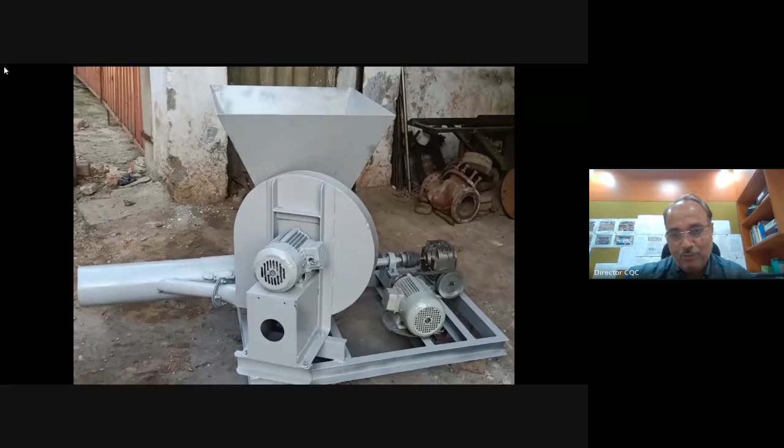Then with a couple of local jugaad-type people working in Punjab, we got this machine developed. This machine is not for shredding the plastic, but it is a plastic mixing machine. Here you can see this is similar to our atta chakki. The waste plastic, shredded, is pushed into this hopper.

From this hopper, it comes through this pipe. This pipe is insulated, and there is a fan or motor behind it which pushes it into the pipe. Through this pipe, the material is inserted into the heating chamber of the previous setup, so the pipe passes through this chamber in which there is fire.

So the plastic is not affected by the fire, and then it goes to the next chamber where it falls from this pipe. Because the pipe is insulated, it is not affected by the heating process. In the next chamber, there are aggregates coming from the conveyor belt, heated in the first chamber, over which the waste plastic falls from this pipe.

The plastic itself is not heated; the aggregates are heated to 175 degrees centigrade. When they come in contact, the plastic coats the surface of the aggregates and there is no burning of plastic. So now we have recommended that this kind of device should be used for pushing the plastic into the mixing plant.

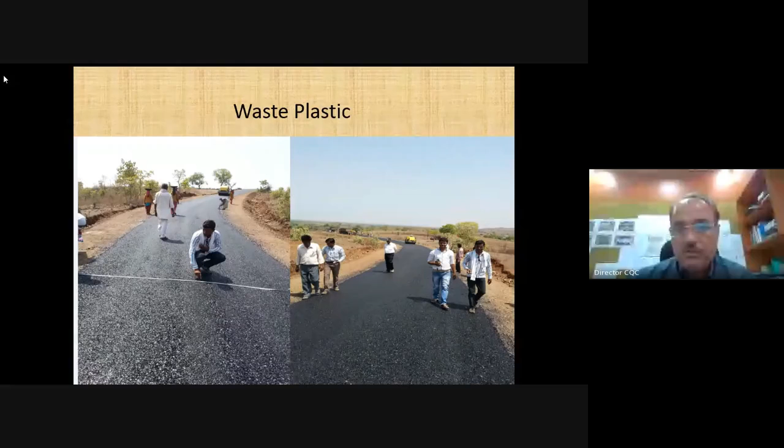By that time around 13,000 kilometers had already been built, and that is why I said that almost 15,000 kilometers have been built by now, because every year we are constructing -- last year, 2020, was a big problem because of COVID, and in 2019 also we could not do much, but otherwise we are constructing almost 40,000 kilometers per annum.

Now, what kind of plastic can be used and what kind cannot be used? This IRC SP 98 2013 has brought out very clearly which are the grades of plastic that can be used.

There is a table given in IRC SP 98 2013 which clearly specifies what kind of plastic should be used and which categories of plastic should not be used. Anyone interested in this process should refer to IRC SP 98.

Now the Ministry of Road Transport and Highways has also issued guidelines to most of their bigger projects that within 50 kilometers from large cities, if there is a project going on, the use of waste plastic has been made mandatory. But this needs to be looked into very carefully.

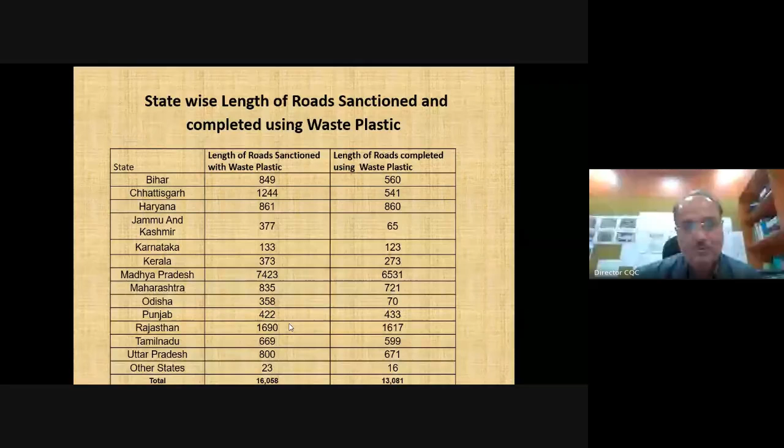But I hope that maybe in the next couple of months the updated version with whatever recommendation is made will come up. This covers only the dry process of use of waste plastic.

So I think from my side, I have tried to cover up both these things which were asked by the organizers. Thank you very much for patiently hearing, and if you have any questions, I will try to answer from my side.